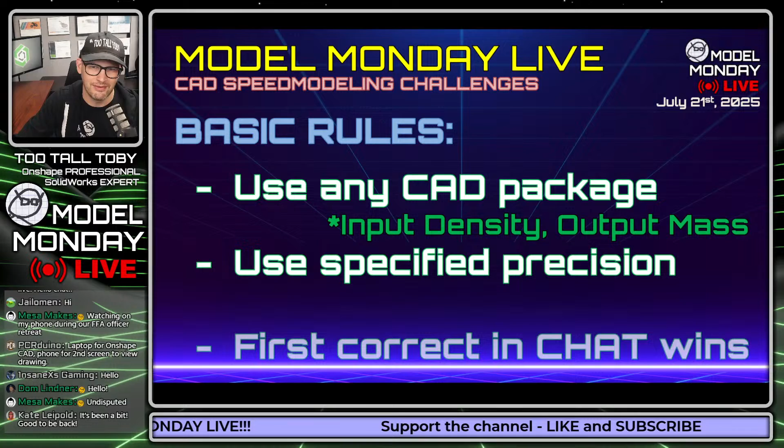The first person to answer correctly in the chat will win, and you will win a point on our Model Monday Live leaderboard. Now, I mentioned a moment ago that the materials do need to be correct, so you may want to take a screen capture of what we're looking at here.

You know, you could use the print screen on your keyboard, or use Snagit or MW Snap, or whatever it is you want to use, Windows snipping tool. But maybe just take a moment and make sure you've got these materials and you've got the correct densities.

Now, over on the TooTallToby Discord, there is a channel called Materials Tools, where we've got a lot of people contributing and explaining how to set up materials for different CAD systems, whether it's Onshape or Fusion or Inventor, or whether you're using FreeCAD or Libre or any of the different popular CAD systems.

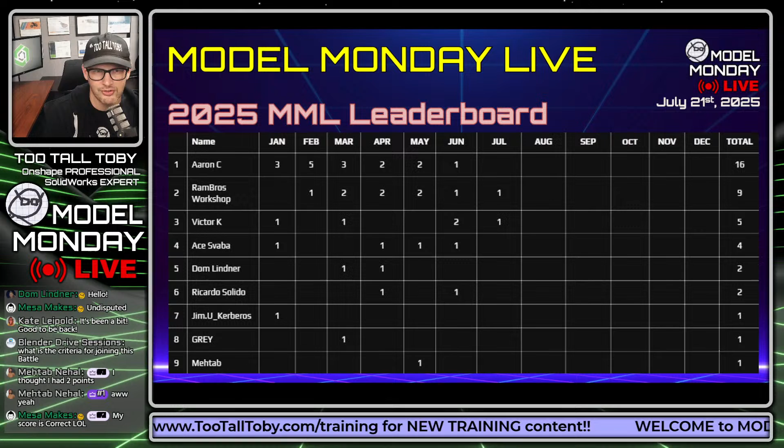All right guys, the advanced rules are this is meant to be fun and good-spirited. Occasionally I do make mistakes on the drawings, and when I do we just kind of correct it on the fly. And the Ivan exploit is permitted. If you're not familiar with the Ivan exploit, don't worry, we're going to be having a video possibly coming out sometime in the future.

All right guys, let's get into this very first challenge. This first challenge is going to be live as soon as I show this print full screen. You can start modeling, and as soon as you come up with the correct mass, just type it directly into the YouTube chat. This first Model Monday Live challenge begins in... wait a second, this looks like it's going to be a little off. Let's see if we can get this into a spot where we can see everything. We don't want to lose any data here. All right, let's see if that looks a little better. Begins in 3, 2, 1, go.

What is the mass of this part in x.xx pounds? Now, of course, this is an older part from one of our earlier tournaments, modified as always, we never give you the exact same models as we see in the tournaments. You can see here that this is a model created in inches, using IPS, inch-pound-second. So what is the mass in pounds? The material is plain carbon steel.

This is one that we are definitely going to add to the practice models library in the near future, because I think there are a lot of fun lessons to learn and cool things we can do to speed model this and create some tutorials for it. There's lots of cool, not really exploits, but time-saving shortcuts we can divulge by providing users with tutorials or demonstrations of how to model this part. So we're definitely going to see a live solve or a tutorial on this model, and also see it added to the practice models library proper in the next couple of weeks. Be on the lookout for that.

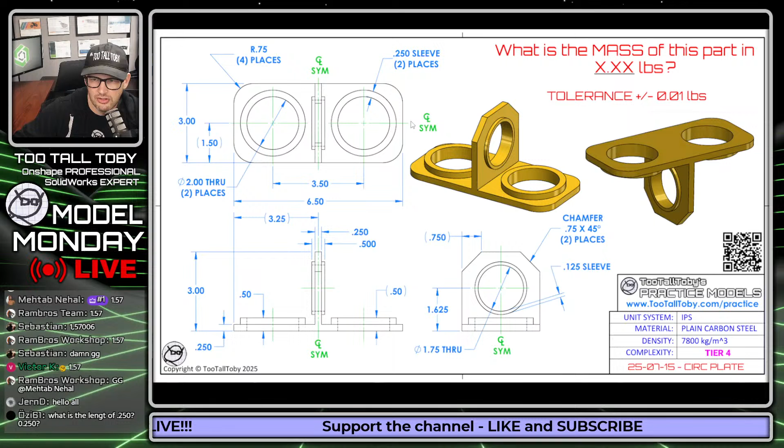What's up, Jern? How are you doing? What is the length of 0.250? It's in inches. It's in the unit system's IPS, and that means inch, pound, seconds.

All right, Spider Gaming revising his answer. You are allowed to revise your answer. That is allowed, and we just take whatever your final answer is as the answer.

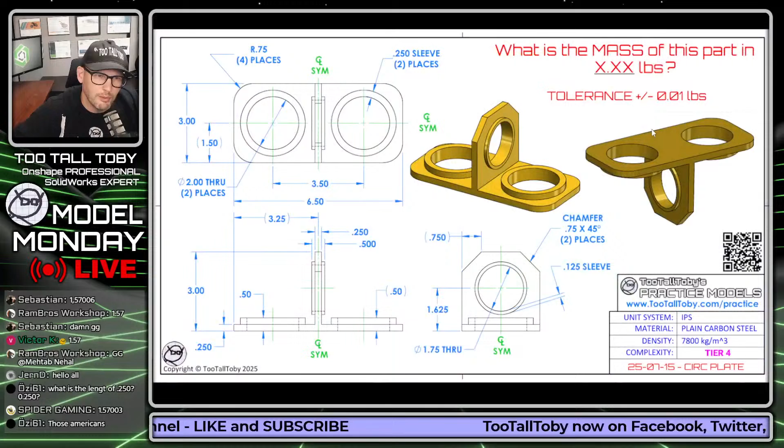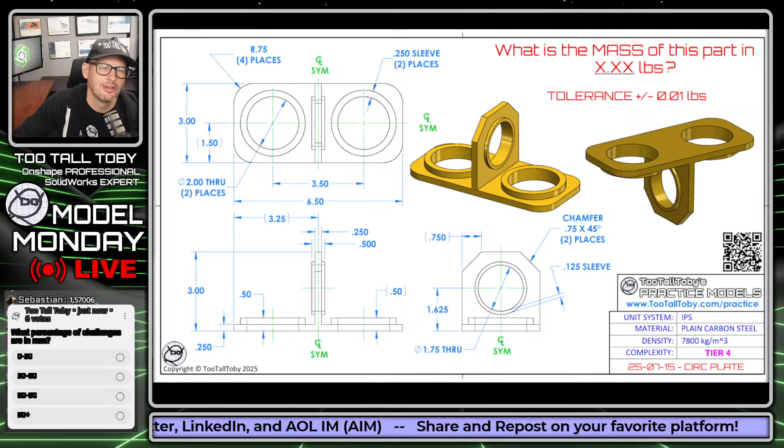I'm going to say, why don't you guys tell me in the chat what percentage of my challenges are in, let's just ask it here. I'm going to ask it with a poll. So here's the question: what percentage of challenges are in millimeters? We're going to say here 0 to 30, 30 to 60, 60 to 90, or 90 plus. So what do you guys think? What percentage of the TTT challenges are in millimeters?

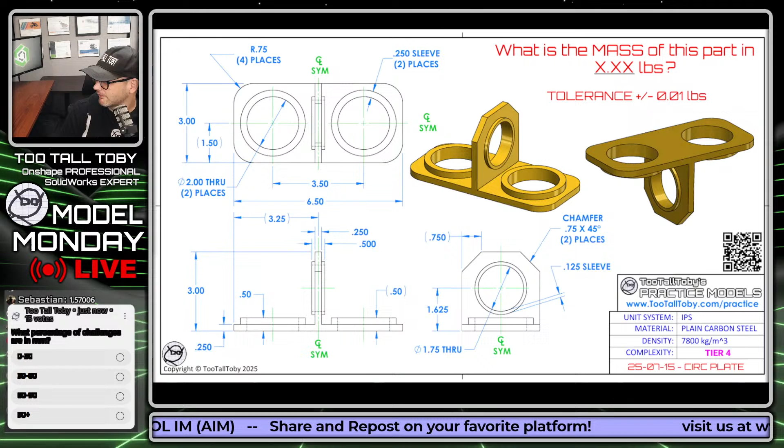Because I think it's pretty heavily balanced in millimeters, but you guys out there in the audience, let us know what you think. I probably didn't do very good ranges there. It's probably like 65%, something like that. The ranges probably aren't that good. So we're going to let you guys tell us what percentage of the challenges you think are in millimeters.

But we do try to create the challenges, some of them in millimeters and some in inches, because it's important for our users. A lot of our users are students, and it's important for them to know how to change their unit system. It's kind of like how we have different materials, it's important for users to know how to change materials and unit systems. It's just very important, because as they go through their career, there's going to come times where they need to change the unit. Now, maybe it's not from millimeters to inches.

Maybe it's from millimeters to meters or to centimeters or something like that. But regardless, the skill set is still an important one to learn.

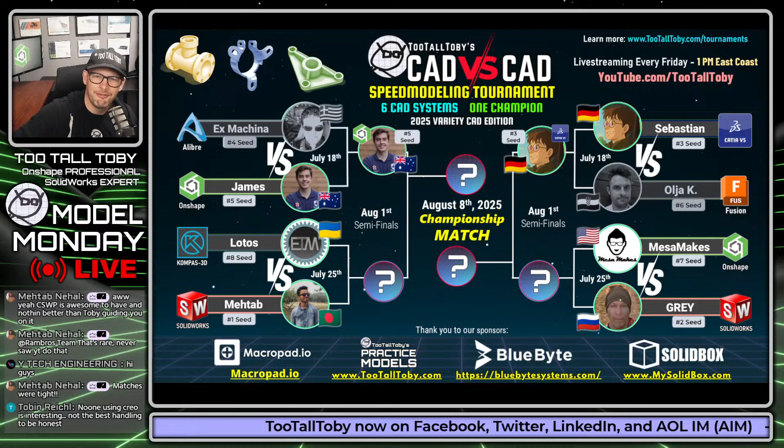But ultimately it was James using Onshape, our number 5 seed from Australia, who moved on, and it was Sebastian using CATIA, our number 3 seed from Germany, who moved on to the Final 4. So we are going to see them again on August 1st when we do our semifinals, and then whoever wins their match is going to go on to the August 8th championship match.

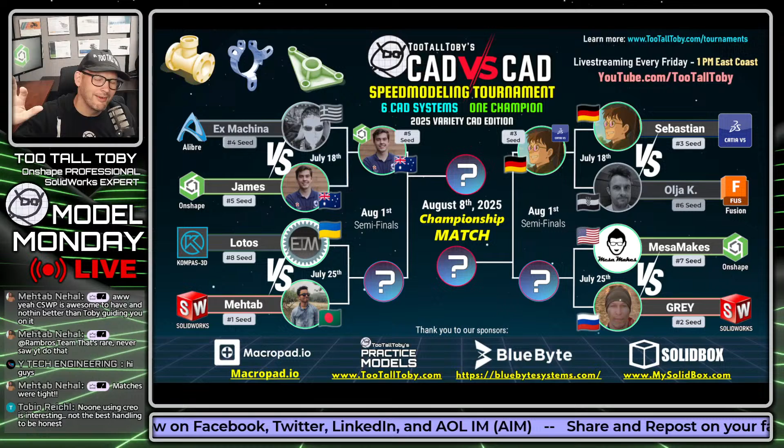Tobin in the chat says no one using Creo is interesting, not the best handling to be honest. Listen, any CAD system is welcome, and I do my best to get out there and advertise to all the different CAD systems. We haven't really seen much of a showing from NX, we haven't really seen much of a showing from Creo, but all CAD systems are welcome, and we definitely try to get out there and let people know.

And if you guys want to do the same, I know Kate is always out there letting people know in the Creo world about this contest and about these competitions. And we would love to get users in there.

Tinkercad, absolutely. Some of these CAD systems don't have the built-in functionality to assign material or assign density, but a lot of them have open source custom API capabilities or custom programming capabilities. So you could always create a custom script or macro that would do density in a program like Tinkercad. We saw that a lot with the FreeCAD community - they've gone through and created custom tools to calculate the mass based on density. So this is totally open to any 3D CAD system as long as you can create accurate measurements and create an accurate 3D model. As long as you can use that to calculate mass, all CAD are welcome.

If I can export an STL, it can technically compete in the TTT competition. Yeah, exactly. All right.

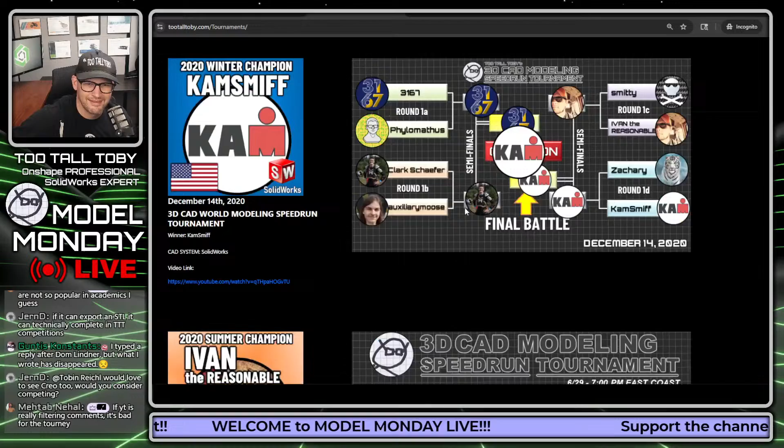Guys, the tournaments are underway. Check us out, TooTallToby.com slash tournaments. One of the things I like about that page is that it functions as the wall of fame. You can scroll down and see all of our past champions. I just think it looks really cool, being able to see all the different CAD systems that have won this tournament in the past. So congratulations to all of our past champions using all these different vibrant CAD systems. Very excited to see who wins this next one. It's definitely going to be exciting.

The other thing you'll see on the tournaments page is that you can click here for calendar reminders, and that takes you to a copy of my Google Calendar where each of the upcoming tournaments, along with their live stream info, is included. You can easily just say copy to my calendar. So if you're logged in and also logged into your Google account, that'll make it really easy to copy and paste this, and you'll have a link right to the live stream. So be on the lookout for that - it's just another one of the many services we offer here at TooTallToby.com.

All right, a little discussion there in the chat. I'm watching the discussion about the comments getting filtered. Yeah, it's not going to be good if they're getting filtered, and that filtering is not going to be good for the tournament. We actually almost saw something like that from Sebastian during the tournament, so we're definitely on the lookout for it.

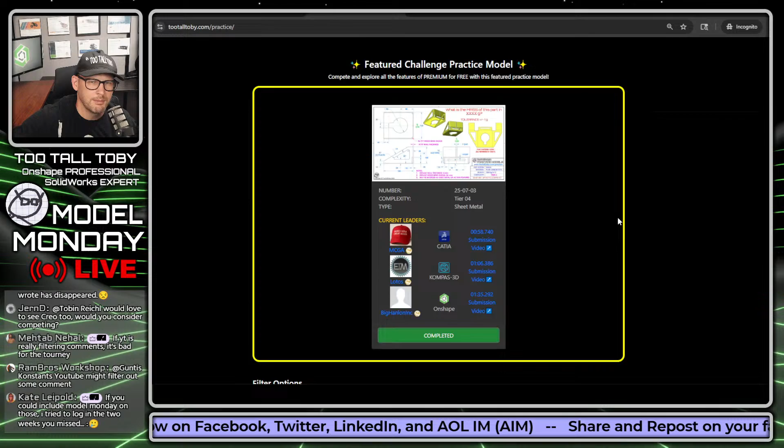So here inside the Practice Models app, we've got the section called the First 42, and that shows us the first answer submissions based on when the model is released.

In just a few moments, I'm going to release a new model here on the website. It's going to show up right here at the top, Featured Challenge Practice Models. It's available for all users. If you've got a free account or a premium account, you're going to be able to compete here today. We're going to see a second challenge show up here in just a couple of minutes, and then we're going to use the website to figure out who got the answer correct first.

So we'll be doing that in just a few minutes. But what are some other things going on with the Practice Models app? Well, first of all, we're adding 10 or more challenges every month, and the challenges have quite a bit of diversity. A lot of times when people ask me what's the deal with the Practice Models app, I like to say it's kind of like a gym for 3D CAD users.

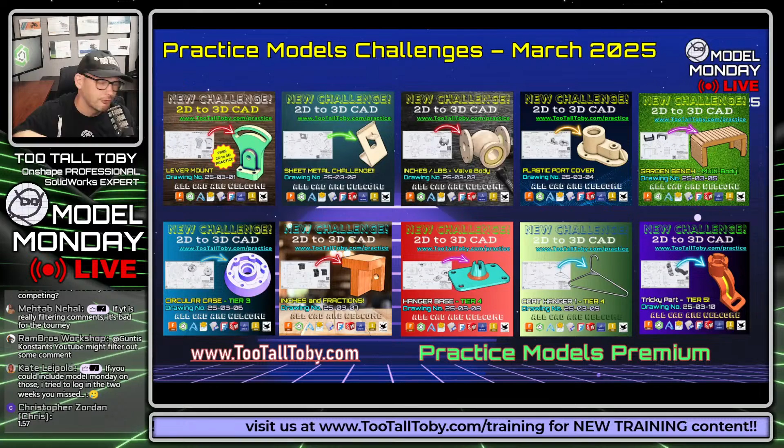Because a lot of times if you're using 3D CAD, you're only really exercising one muscle. You're doing the same kind of sheet metal bracket all day, and you never do molded parts, or 3D printed parts, or weldments. You just do sheet metal all day. Well, the nice thing about the Practice Models app is that those types of users get access to quite the variety of 3D CAD challenges, and in doing so, they might unlock some functionality in their CAD system that they didn't know they had access to, and that might make their sheet metal jobs a little bit easier, a little bit more efficient. So if you're in the world of 3D CAD and you know anybody who's a 3D CAD user, let them know about the Practice Models app.

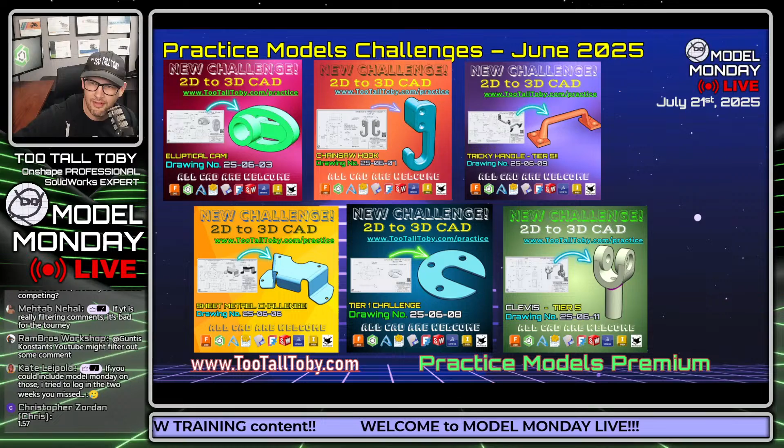And beyond that, we've got some really great capabilities in the Practice Models app itself. There's over 190 models. There's a scoreboard. There's now filters. You can access community tutorials. You can access speed modeling videos. So there's lots of good stuff in here.

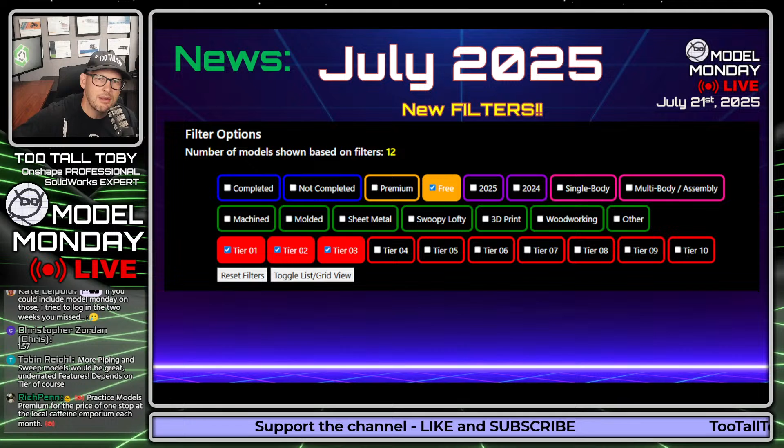And we continue to listen to our users to help understand what we should be adding next. We added the new Featured Challenge Practice Models section, where we can highlight some of the users from the community that are submitting speed modeling runs. We added the new First 42 section that we talked about just a moment ago. We added the speed modeling top 3 videos and the ability to submit a speed modeling video. And then more recently, we added some new functionality with the filters. And even more recently, we added some new sorting capabilities, and we added the new reset timer functionality.

So again, listening to the community here, what is the community telling us? Well, one of the things they're telling us is that it'd be nice if these filters were a little bit quicker. You click on free and then it takes forever for the page to reload. Well, guess what? Not anymore. Look how quick that happened.

199 models. I click on free and boom, we're down to 21. I only want to see the free models that are tier 1. Boom, we're down to these 3 models here. So this way, a brand new user could get logged in and could do some free modeling just to see if they like what's going on with the app.

But as you get more and more advanced, maybe you want to look at some of the premium functionality, and you want to look at some of the ones that are 3D printable. You can see we've got 31 models here that are 3D printable. And we're going down through here, but you know what? I've already done the ones that were first released a long time ago.

Well, check this out. Just recently released this new sort by first or sort by last. So now I can flip that, and now I can see the most recently released models first here up at the top of the list.

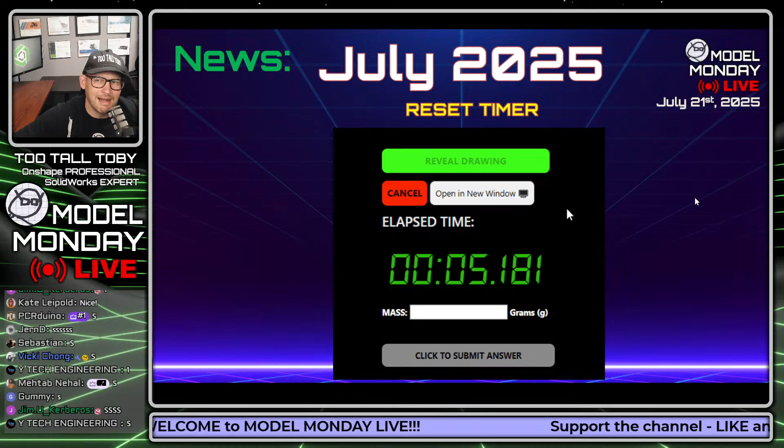So all this great new functionality is constantly being added. We're always trying to improve this so that we can give you the most for your money.

And let's take a look at this first challenge. The answer to this first challenge will be revealed here in just a moment, but let's take a look through the chat and see who answered first. I believe the first answer came in pretty quick after we showed the drawing.

Spider Gaming 2.35, Mehtab 1.57, Rambros Workshop 1.57, Sebastian 1.57, Rambros again 1.57, spamming it in there in case it's getting blocked.

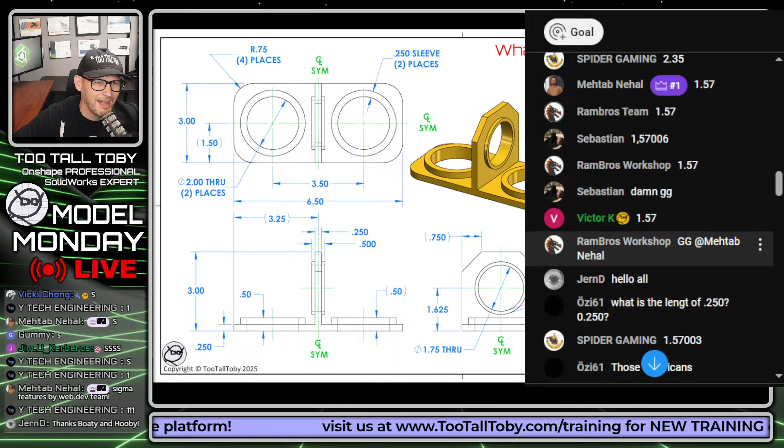Victor K 1.57, Spider Gaming 1.57, Gummy 1.57, Kate coming in with the answer 1.57, Mesa Makes 1.57, Paragene 1.57, Tobin 1.57. I love seeing this convergence of answers. Dom Linder coming in 1.57, Jim U 1.57, Jailomen coming in 1.57, PCRduino 1.57.

Very nice, very nice. I know somebody said that they answered and it came in the wrong order. I remember they said it came in right near Dom. Christopher coming in here 1.57. Very nice, well done everybody.

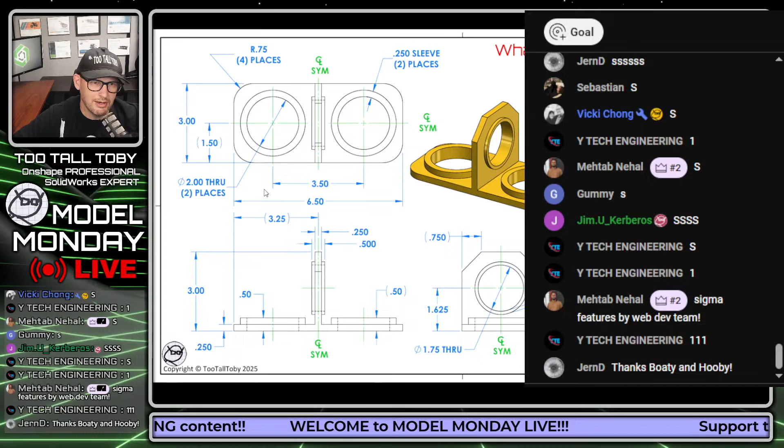Very nicely done. If you were able to answer that and answer it that quickly, that is awesome, you did an awesome job. But there can only be one winner, and that winner is Mehtab. 1.57 is correct. Mehtab was the first one to answer that correctly. We saw Spider Gaming came in first, but Mehtab was the first one to come in with the correct answer.

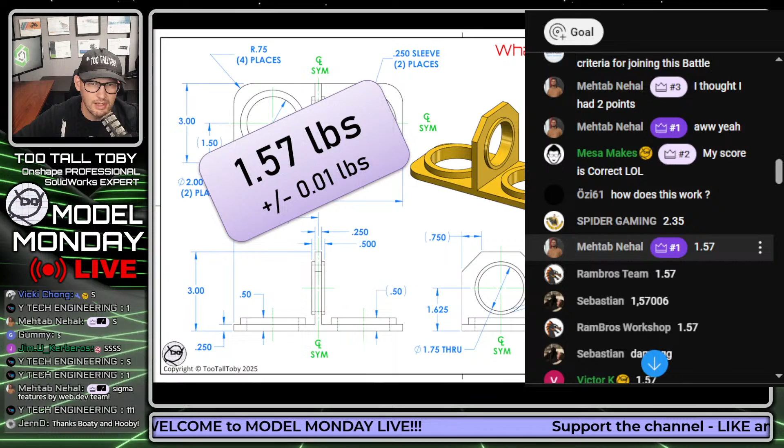1.57 pounds is correct. So guys, put a GG in the chat for Mehtab. GG, Mehtab, well done, well done my friend. That is awesome, and congratulations. Oops, at Mesa Makes, no, at Mehtab.

Congratulations my friend, well done, well done. Nice job, Mehtab earns a point here. That will be his, I guess, his third point, right? It'll be his third point because there's a little typo on the leaderboard. Well done, all right guys.

Well, that brings us to the second half of the show. Congratulations to everybody who got that. That was not necessarily that difficult of a model, but a pretty cool model. And it's not easy to model it up that fast, but I'm very excited to see what types of things people come up with. I was having a lot of fun in Onshape doing things like extruding this first.

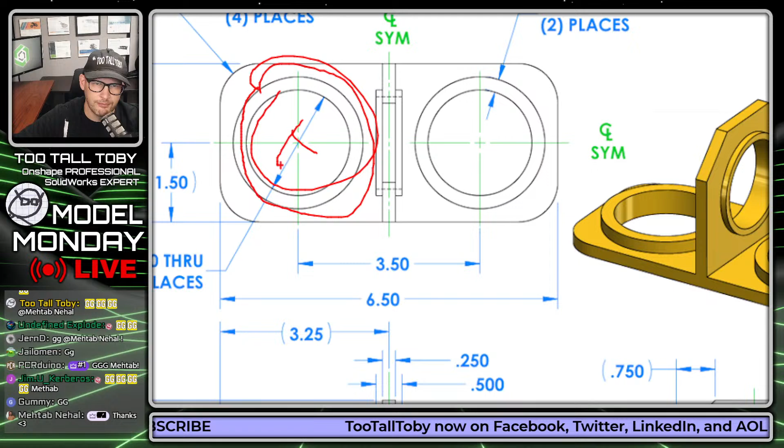And then taking this surface and extruding it, deciding whether or not to extrude both of them together or to mirror them. I think this might be a case where it's actually better to just draw both halves and extrude both halves together rather than mirroring. But I'd be really interested to see what people come up with. Normally a model like this you would mirror, but this might be that kind of rare case where it might actually be better to just do the mirroring at the sketch level and then extrude that whole thing as solid instead of mirroring at the feature level.

But that's where I think we're gonna have a lot of fun when we add this one to the Practice Models app and we can see how people do tutorials and speed runs for this challenge.

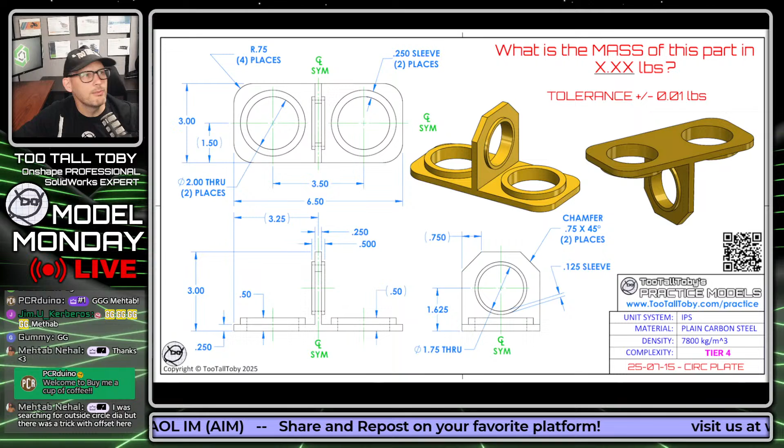All right guys, for this second half of the show, for challenge number 2, we're going to do things a little bit differently. We're going to visit TooTallToby.com, and we are going to make sure that we are all signed up for an account, because in just a moment a new practice model is going to be released. You're going to go to TooTallToby.com, go to the practice models page, and start refreshing on the practice models page.

So when we go in here and say access full library, what we're going to see is that in just a moment, a new challenge is going to show up at the top in the featured models. And when we see that new challenge in the featured models, boom, this challenge is live. It's going to be in the next 10 seconds. So get over to TooTallToby.com, get logged in.

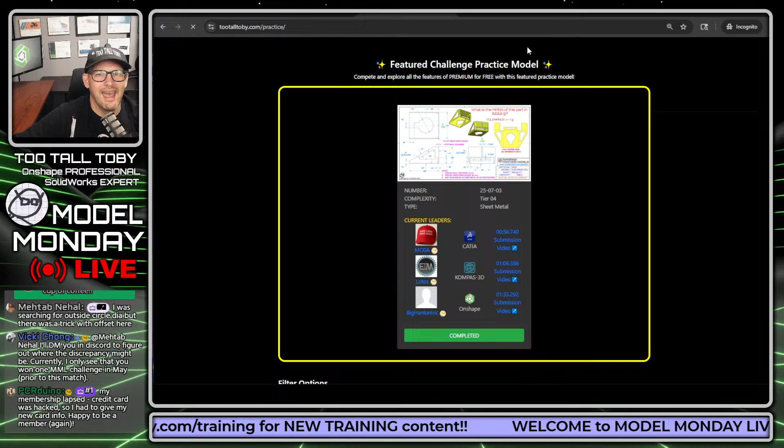See, it's not here yet. It's not here yet. We're going to hit refresh and it's going to be there. We're going to hit refresh, and it's going to be there. And so what you're going to see is that there's going to be a brand new featured model here. There it is, 250706, and boom, this challenge is live.

So good luck. This one is a mold/drafted part challenge, and this is one that I'm very excited to solve here live for all of you using Onshape, and we will get into that in just a moment. So go ahead, jump into it, it says click here to practice, jump into it, and all of you can attempt to model this.

And now we are going to attempt to model this together using Onshape. So right now we're watching this episode of Model Monday Live. It's July 21st, and all the people over in the chat are attempting to create this 3D CAD model, and now we are going to try to create it as well. Maybe we can beat some of these speedsters in the chat.

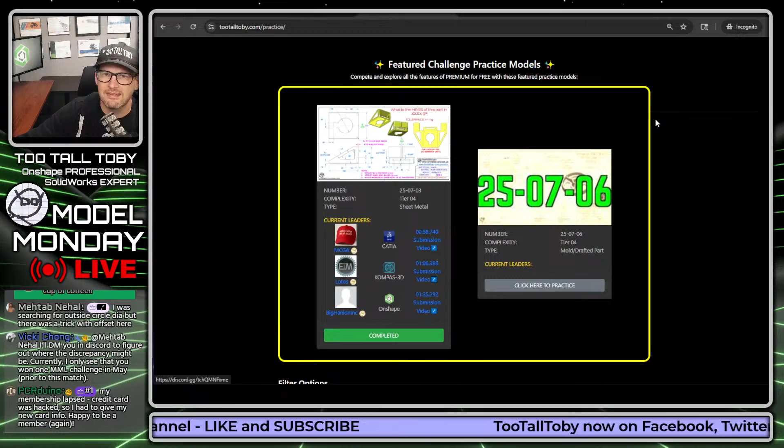So we're going to head on over to TooTallToby.com. We're going to sign up for a free account. We're going to click Access Full Library. And we're going to see here that up at the top of the library, this is a library of over 190 challenges. They can be sorted by the type of challenge that you're trying to do, whether you're trying to do a 3D printed part, a woodworking part, or a sheet metal part. They can be sorted by the level of complexity here, tier 1, tier 2, tier 3, tier 4, tier 5. Can do all this cool sorting here.

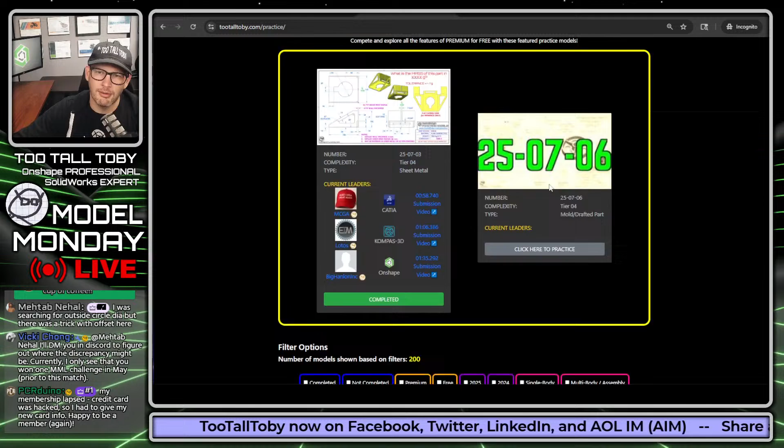But what we're also able to do is participate in these featured challenge practice models up at the top of the screen. And right now, all the people who are watching Model Monday Live are trying to complete this challenge here. So I'm going to click here to practice.

And we're going to see here that there's a lot of skills that are tested in this challenge. Draft, patterns, revolve, ribs, slot tools, symmetry, thin walls. I got a feeling this is a part that's going to be plastic injection molded just from that list of skills there. So let's see here. Nobody's done this yet, but we just released it about 30 seconds ago, so of course nobody's done it yet. I'm going to say click here to begin and go.

So the question here is, what is the mass of this part in grams? And we're going to try to calculate that mass, and then we're going to enter it down here. And if we enter it correctly, we're going to earn a point. If we enter it incorrectly, it's going to say, no, your answer is incorrect, you need to keep trying.

So we need to come up with the correct mass, and we need to come up with the correct material density. So we see down here in the title block that the material density is 1020 kilograms per cubic meter, and that is the material ABS, which I've already got in my Onshape custom library.

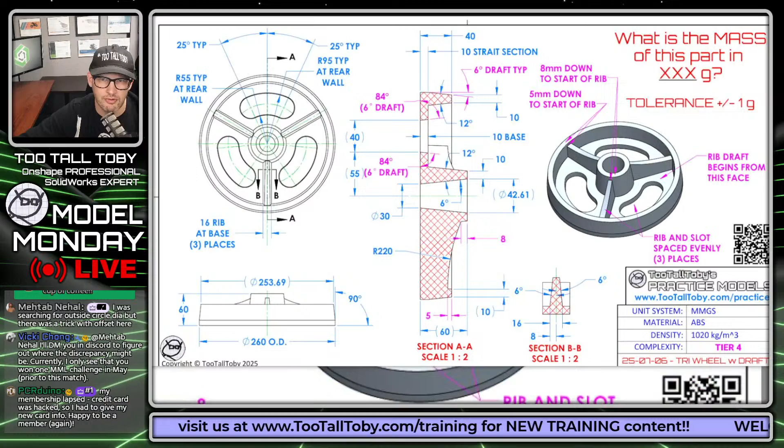So what I like to do is, even though the clock is running, before I get started, I like to come up with a game plan of how I'm going to model this thing up. So I'm looking at this thing, I'm seeing that there's a lot of draft on this part. We see that there's 6-degree draft typical. So we've got this draft here on this sidewall, some draft here as well, some draft here in this kind of center hub area, some draft all the way down to the bottom here.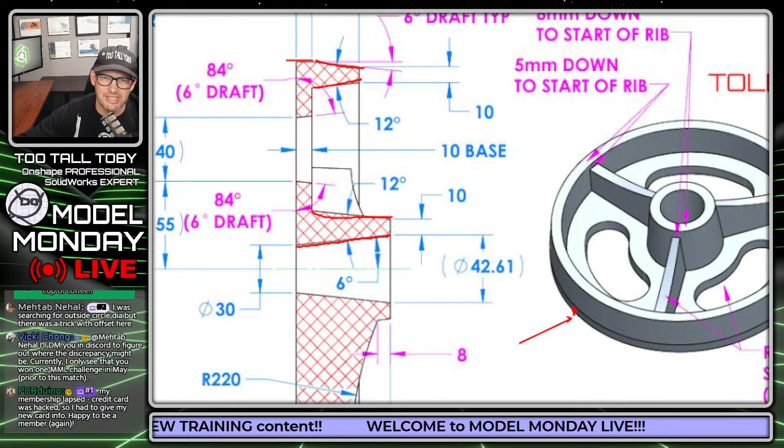It is kind of interesting. There's a section here that's got a note on it that says 10 millimeter straight section. So it's almost like the sidewall here, if we're looking at this thing in the isometric view, there's like a straight section there for some reason. Normally you wouldn't see that in injection molding, although depending on the geometry and depending on the material, sometimes you could get the ejector pins to push that part out even if it had a flat wall there. But you run the risk of that maybe getting stuck in the mold. So normally you wouldn't have that. But in the case of this model, we can see that we do have a little section on the model that is truly vertical. It's kind of interesting there.

All right, so now let's talk about the game plan. I think in a model like this, what I'm going to do is start out with a revolved shape. With a revolve, what you would do is start out with maybe a construction line coming up through the middle, and then create the geometry that you're going to be revolving about that construction line. So I think what I'll probably do is draw a shape that looks something like this.

If we were imagining this as a section view, I'll create a shape that looks something like this, and I'll leave that gap there for the center bore, and then I will revolve that about a center line, and that's going to give me kind of the main wheel shape.

So if we're looking at this over here in the section view, that shape I just drew is going to look something like this. It's going to come up here, over, down at the angle. I'm going to include the draft angle there, over, up at a draft angle, down here. Then we'll have this little straight section, and then we'll close that off.

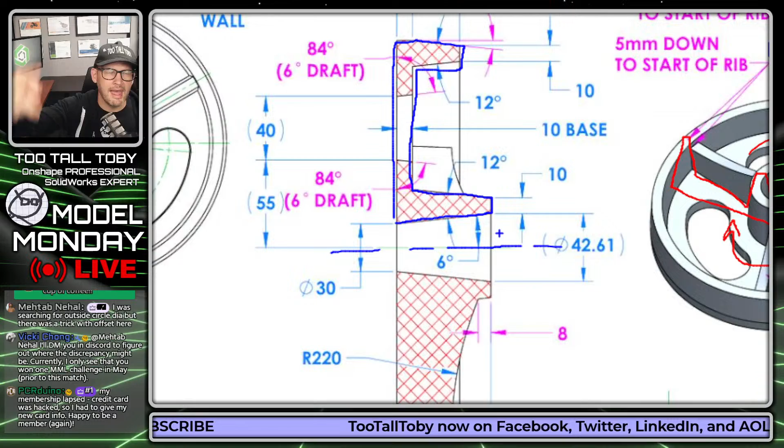That's going to be my first sketch, along with a little construction line here, so I can revolve that first sketch. I think the next feature I'm going to tackle is this rib shape. We notice with these notes on the rib shape, we're starting out 8 millimeters down from the middle of the part, 5 millimeters down from the outside of the part. And it looks like that rib has some curvature to it, a radius here of 220 millimeters. So it's kind of an interesting, curved rib shape.

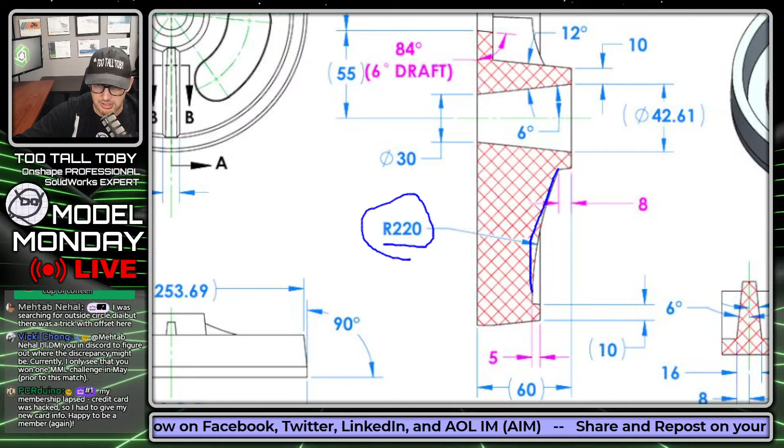I think what I'll do is create that right on the right plane, create that rib, and then bring it down with some straight geometry, straight down into the model. Then I'll go back in afterwards and add some draft, because you can see the rib draft begins from this face down here. Another little Toby note there - you wouldn't normally see that in an engineering drawing, but we're doing kind of education here.

But instead what you'd typically see is this section view BB, where we're clearly seeing this is 16 millimeters at the bottom, and it's got 6 degrees per side of draft going up to the top. There's also a note looking down on this from the top view - these ribs are 16 millimeters at the base. So a little bit tricky here, if you've never done any injection mold design, this might be new to you.

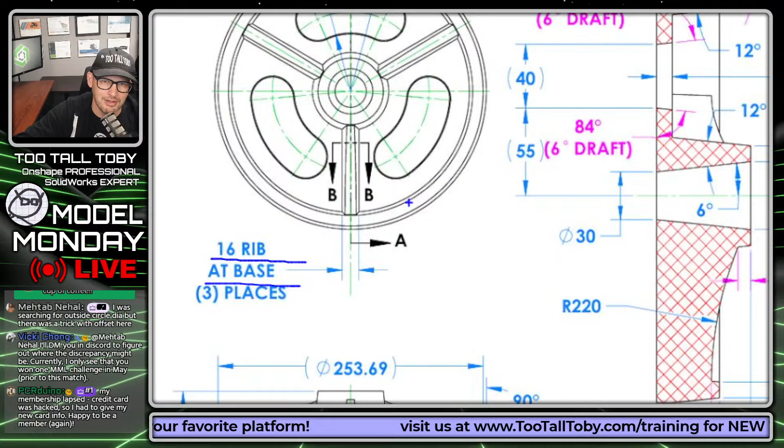But basically, we'll add some draft here using what's called a neutral plane, and then we'll bring that up. This is kind of a cool feature because we're also going to use what's called intersection curve, which is kind of a cool thing you can do when working in 3D CAD.

All right, so that takes care of those features, and then I think the final feature we need to create is this slot shape. Once again, we have some draft here on this slot shape. We can see we've got this dimension 40 at the bottom, 40 at the bottom here, and then we've got 6 degrees of draft on that slot shape.

And then if we come over here, we see this note says radius 55, so this radius 55 here at the rear wall, radius 95 at the rear wall. And so that 55 and that 95 makes that 40 that we saw in that side view.

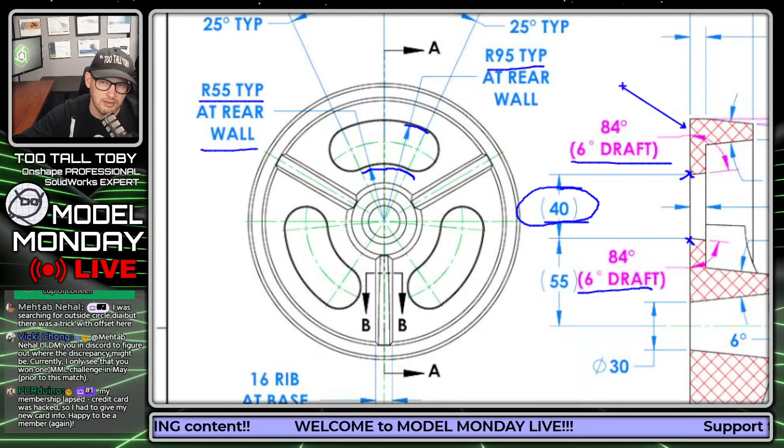So I think what I'll do is create that sketch on this back face, and then I'll probably just cut extrude it with draft - may as well just include the draft in that cut extrude. So a few different ways we're going to be creating draft here: draft during the revolve, draft in the rib with the neutral plane, draft as its own feature, and then draft as part of the cut extrude.

And then once we're done, we can just pattern that around 3 times, and we should be good to come up with the answer. So let's see if that comes in correct, and let's see if any of our speed demons in the chat are able to beat me.

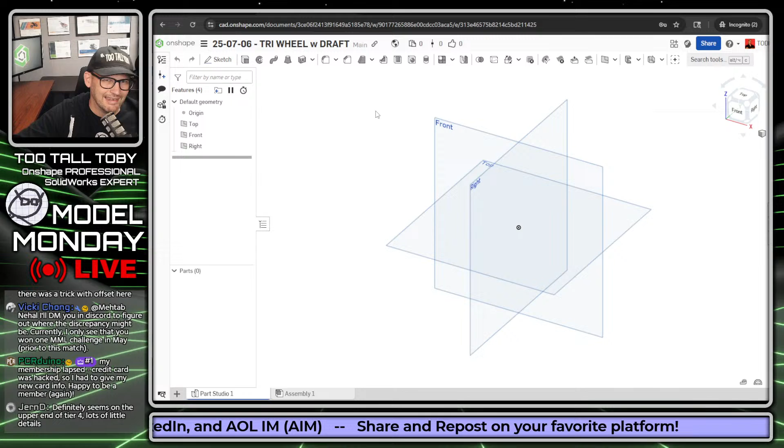Jern in the chat says, definitely seems on upper end of tier 4, lots of little details. Yeah, it was surprising to me how few features ended up in the tree. The tier 4 is really the complexity more so than the difficulty, and the complexity is just based on the number of features. Difficulty is a little bit more subjective, based on your experience. If you do injection mold all day, every day, this probably won't be that difficult. But if this is your first time working with an injection molded part, you might get a little bit lost in the details for sure.

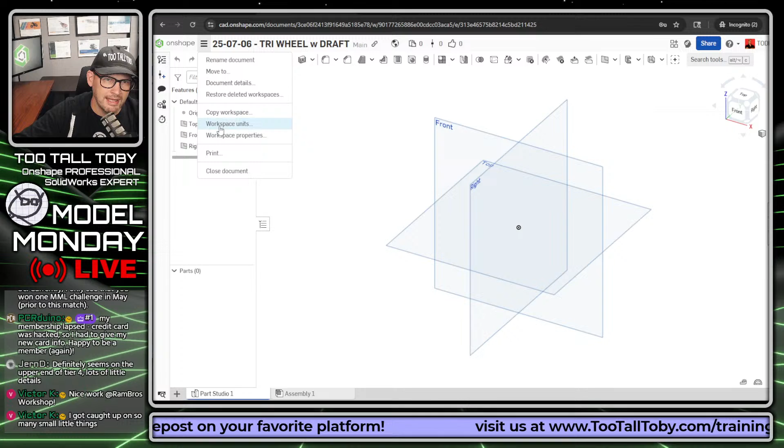All right, now that we're in this model here in Onshape, I'm going to start by clicking on this icon up here. That icon is going to give me access to a menu, called a hamburger menu, and from the hamburger menu I can choose my workspace units. I always like to do this, look at the drawing, look at the title block. It says it's in MMGS, so I always like to make sure my unit for length is in millimeters and my unit for mass is in grams. Those two both look correct.

Now let's get into our game plan here and start with our first sketch. I think I'll go to the right plane to create this sketch. I'm not really sure which plane I want this to be on. This is kind of like the front view, right? Should I sketch it on its side? This is always a question that's sometimes easier to answer when you know how the model is used. But I think what I'm going to do is just make this my right plane, and sketch the whole thing on the right plane in kind of an upright position. I don't know if that's good or not, it depends on how this model's used in an assembly, but it should work fine.

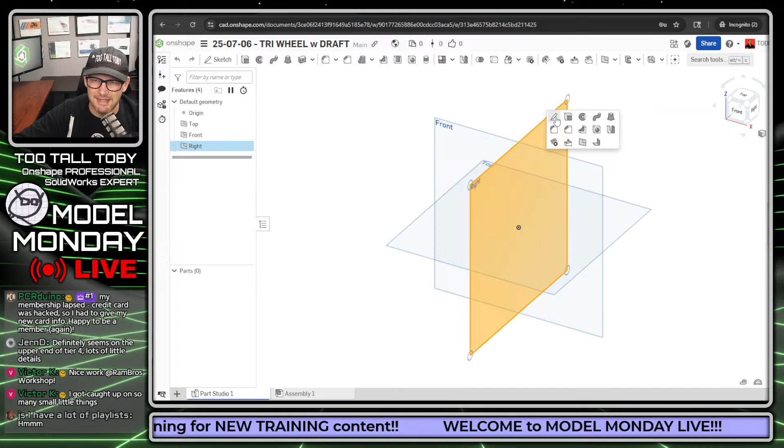So right plane, I'm going to press the S key, begin a sketch, press the N key. Actually, before I get started here, let's bring up our keyboard cam, that way you guys can see all the keyboard shortcuts I'm using. So I click on the right plane, press the letter S, choose the sketch command, press the letter N. Now I'm in a new sketch on the right plane, and what N does is it rotates the view normal, so it's a little easier to see. Now I'm going to press the S key again.

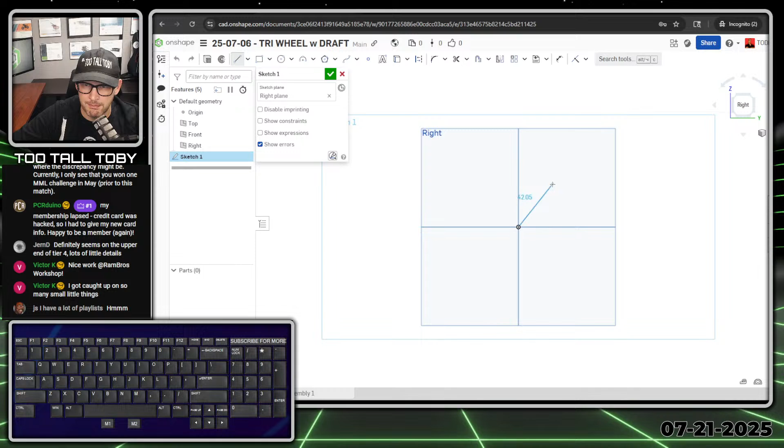I'm going to create a line here, single click the origin, move over, press Q - that makes that for construction, and I'm just going to drop a line out here. Maybe I'll make this close to the 60 millimeter max height, just to give me a little sense of proportion. Now I'm going to hit escape, and create some additional geometry using the line command. So single click the line command. I could click here on this point, move up, single click, let go of my mouse, and type 15 because that lower bore is 30 millimeters. Then I can come out this way the rest of the way. Again, I'm just trying to establish a sense of proportion so that I'm not too far off with my final results here.

So this one I'm going to come up at 10 millimeters, so I'll move over here, 10, single click, let go, 10, enter. Then I'm going to come up at an angle, move down this way, single click, let go of my mouse. I'll type in 10 because that upper ledge is 10 millimeters. Move back down here at an angle. Now the base is also 10 millimeters, so I could hold my mouse over this point and get a relationship there of vertical, and that way I don't have to add that extra dimension.

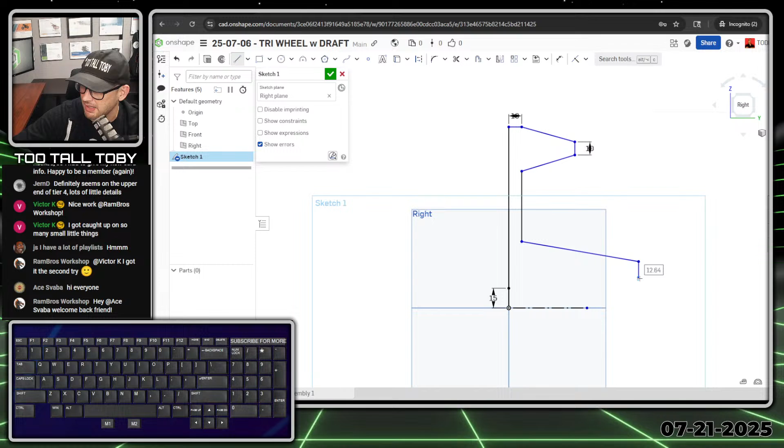Move my mouse down this way, move my mouse up like so, single click, move my mouse this way, single click, let go of my mouse. I can type in 10 again, enter, and then I can finish off by coming down here to that original point. Single click, and boom, done.

Now, personally, I think I would rather have a diameter here at the bottom, so I'm going to hit escape, single click, eliminate that dimension, maybe even eliminate that line. It's not really going to hurt me, but it's just kind of in the way. And then I could take this point and make them vertical, V. So that line there goes black. This line here, it's orange currently. You can see it's black, meaning it's fully constrained.

And now I can go D key dimension, and I can create a dimension from this point to this line and then move across that line. That lets us create what's called a doubled dimension in Onshape, very useful. So we're going to make that 30, enter.

We're going to create a dimension here from this point to that line. Again, cross over that line for that doubled dimension. That's going to be 260, enter. We could create a dimension that goes from this line to this line. That dimension is going to be at a height of, what is the height to that location? Let's see here, 40, enter.

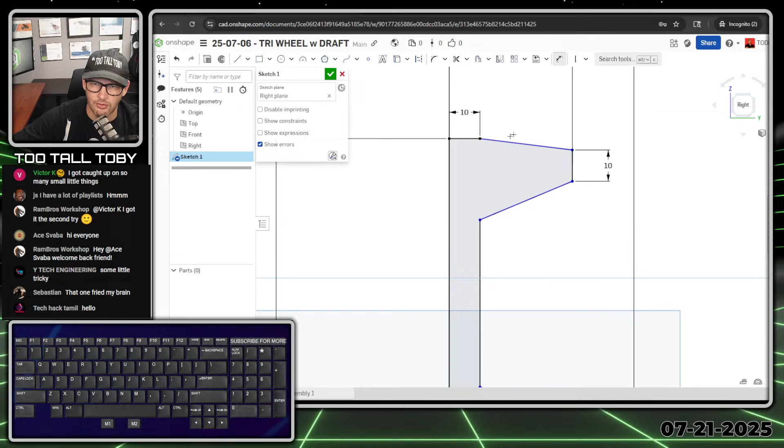And then a dimension from this line to this line. That's going to give us a height of 60, enter. And then the final dimensions we're going to put in here are going to be our draft angles. So from this line to this line here, that's going to be a draft angle of 6. From this line to this line here, that's going to be 6 plus 6, so that gives us 12. So draft in both directions. Dimension here from this line to this line here, that's going to be 6. And then a dimension here from this line to this line, that is going to be 12.

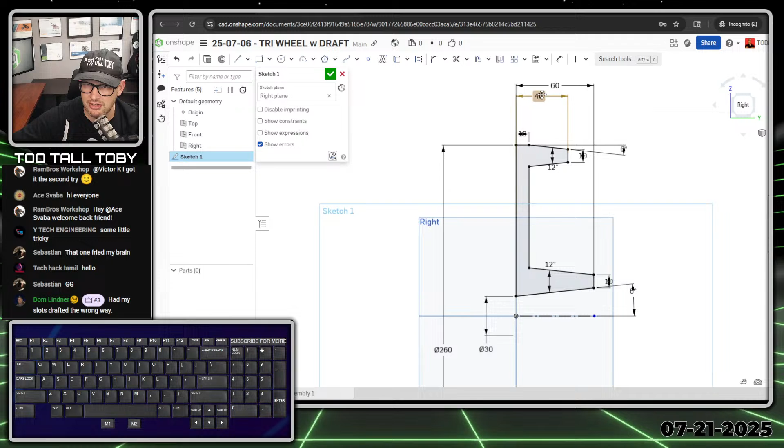And for me personally, I think this is a great place to stop with that first sketch. It gives us all the key dimensions for that revolve. The sketch is starting to get a little cumbersome, and I don't really like it when my sketches get too complicated. So if you're watching this as a tutorial, maybe take a moment, pause the video, and get your sketch to look like this, and then you'll be ready to move into the next step and turn this thing into a revolve.

So I think what I'm going to do next is choose to revolve this thing.

I see in the chat, Sebastian says that one fried my brain. Yeah, this is definitely one with a lot of cool little details, so I'm glad to hear that. I'm sorry to hear your brain got fried, but glad you like these kinds of challenges, because these are the fun ones. Remember, the website's supposed to be like a gym for your brain. TooTallToby.com, practice models, it should be like a gym for your brain. So if your brain feels fried this time and you go back and do it again, you're going to feel a lot stronger. And then when you run into something like this at the office, you're going to be ready to go, ready to handle it.

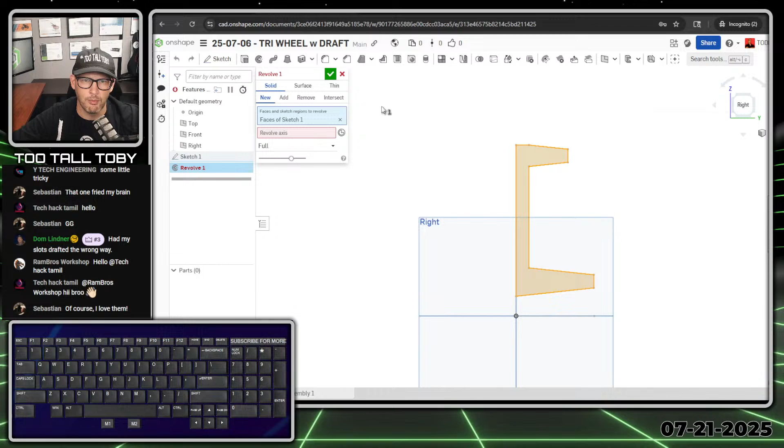So let's say this is our first sketch. We're going to go to revolve. In Onshape, I've got this whole sketch and this center line that I'm going to revolve about. So I just click revolve, and then press tab. Tab will advance me from this box down to this box, so I use the tab key as a shortcut there for that workflow. Now I'm in revolve axis. I can just click on this line down here, my center line, and then press enter. Boom, there's that revolved shape, and that's the main shape of the wheel.

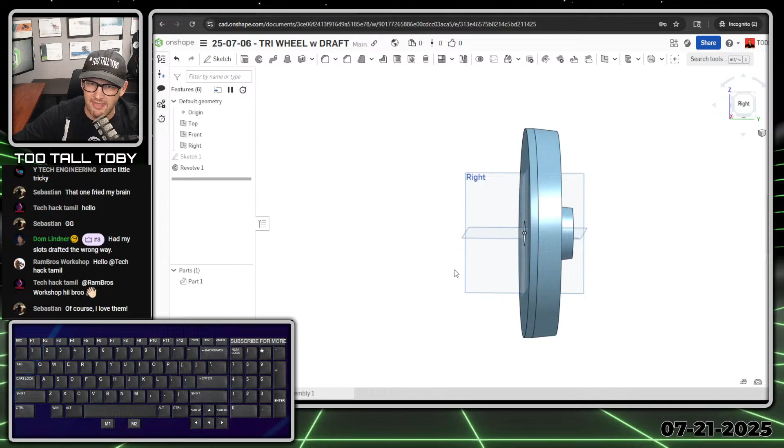And let's now move on. So I'm going to press Shift 7, which is my shortcut for isometric, and that way I can see which plane is cutting down through the middle here, and it looks to be my right plane. So I'm going to pick that right plane, S key, begin a sketch. And now I'm in sketch mode here on the right plane.

Now I'm going to use a really cool command in Onshape called intersection curve. What intersection does is let us grab the intersection of the right plane we're sketching on and this face here, which is a cone, and turn it into a line.

It's going to let us grab the intersection of the right plane and this face here, which is planar, so we'll have a line that comes across here. And the intersection of this cone face and the right plane creates a line here like so.

And I'm just going to grab a few other lines. The reason I'm doing this is because I think it really makes it easy to visualize what's going on through that section of the model.

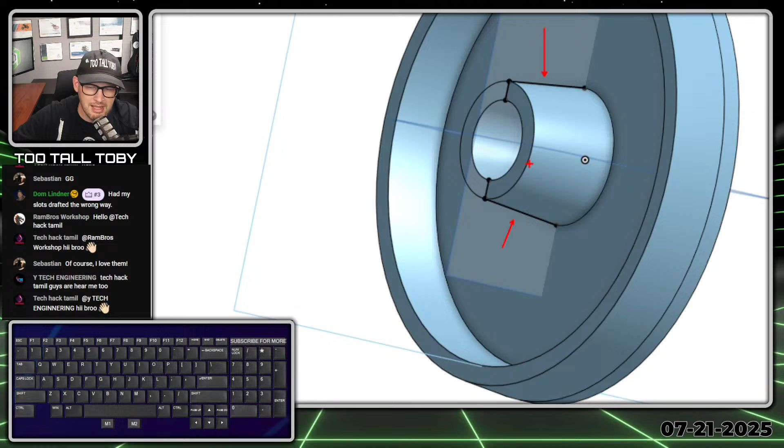So I'm sketching here on the right plane. I'm going to fly out this menu that says use, and choose intersection. Then I'm going to start picking faces. This face here, wherever it's intersecting the right plane, lines have been created in my sketch. This face here too, and this face here, and this face here, and maybe even this face here.

So that really makes it easy to quickly get almost reference geometry that you're going to need to create this rib shape, or that's going to help you create it. Because now, to create the rib, all we need to do is choose the 3-point arc command.

So I'm going to exit the intersection command and choose the 3-point arc command. I'm going to draw an arc that goes from here to here, a little arc between those two. Then I'm going to give that arc a radius of 220. 220, enter. Now what do I need to do?

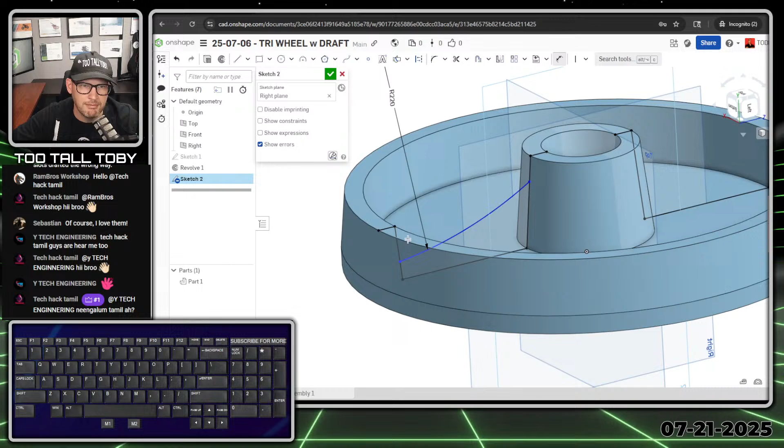All I need to do now is add in my dimensions. So I'm going to press the S key, go to dimension, and create a dimension that goes from this line to this point. That dimension is going to be 5, enter.

Let's hit escape and get this point down below here. S key, dimension from this line down to this point, and that's going to be a dimension of 8. And boom, we are done with that sketch.

That's the sketch for the rib. Now, I know that there's a lot of extra geometry here. Do we have to go through and delete that? No, not at all, not in Onshape. We can just exit the sketch and choose the rib command.

Here's the rib command in Onshape, rib up at the top there. Once we choose that rib command, we can choose our sketch profiles, which is just going to be this arc here. We can then choose this second box here. I noticed it really helps if you choose this second box, parts, and then just click this part.

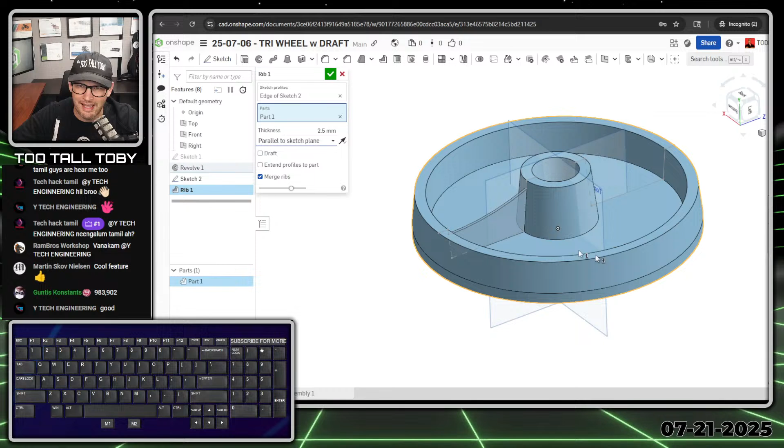So if you're not getting your rib preview, that may be the extra step you need. Just make sure you click in that second box and click this part. Then you've got the option here, parallel to sketch plane or normal to sketch plane. You see normal to sketch plane, it goes a little crazy, and parallel to sketch plane actually works this time. Basically that means that when we sketched on the right plane...

The right plane is running through the model like this, so the rib is also going to run through the model like this. It's just going to run parallel to the sketch plane as opposed to normal to the sketch plane, which would be 90 degrees from the sketch plane. Sometimes that's what we want, but not in this example.

So we're going to change that thickness to, let's see here, 16 millimeters, enter. And there we go, there is our rib. We're also going to use this option that says extend profiles to part. That will extend this little extra amount here, if that extra amount wasn't coming through. Then we can hit the green check mark, and that creates our rib at 16 millimeters.

Now, the one thing about this face here that really doesn't look that good is that we've got this face, and this face, and this face.

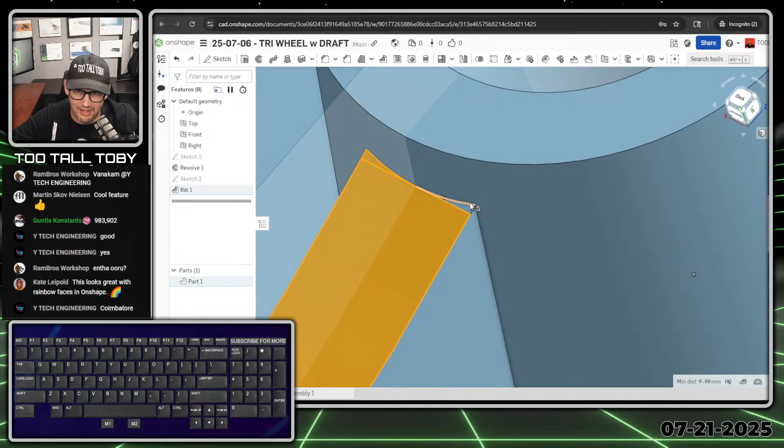We've got these extra faces here. So is that really going to make a big deal? It might not - it depends on if you're using finite element analysis, and it depends on if your machinists have a problem with having those extra faces. So if you do want to get rid of those faces, I think the best way to do that is to use delete face.

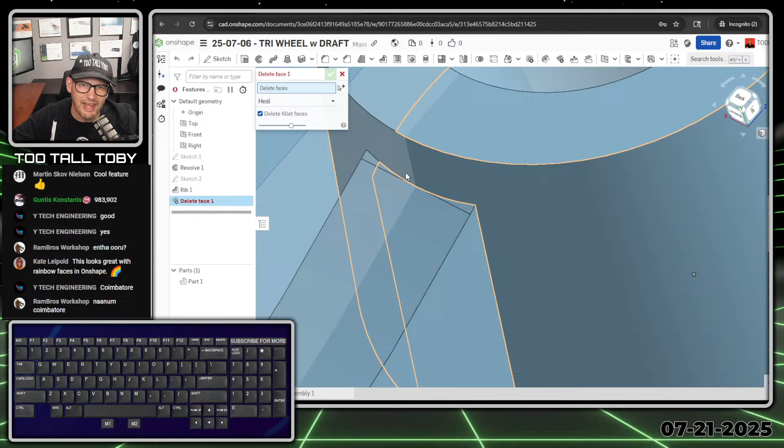So I'm going to choose delete face here. And when I choose delete face, I can choose this little dingus there, that extra geometry that I wasn't anticipating. So I'm going to delete those two little faces and say heal, and hit the green check mark, and oh yeah, that's what we wanted.

Thumbs up in the chat, thumbs up in the video if you enjoy that usage of delete face. We always see those questions - is there any way to get rid of these extra little faces? Well, a lot of times the way you get rid of them is with delete face. Yeah, delete face is absolutely epic.

So now we're going to add draft manually, or after the feature. We're going to do that by choosing this button right here, draft. So we choose draft, and then we say neutral plane. Now what neutral plane is, it's where the draft is originating from. And in the case of this rib, the draft is going to originate from that bottom face of the model.

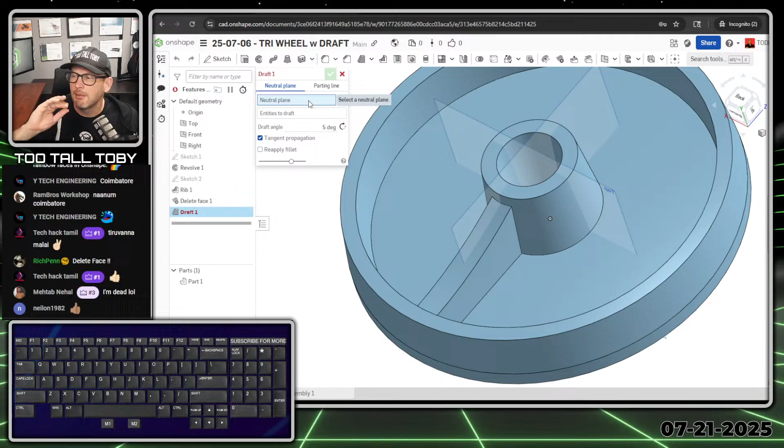We saw some notes on that, and we also see that in the section view BB. So the draft is going to originate from the bottom face of the model, or from this face here, the bottom of the pocket - so that is our neutral plane. And then for our entities to draft, we're going to choose this face and this face. And then finally, the draft angle is supposed to be 5 degrees per side, so you would just type in 5 here, enter, and enter.

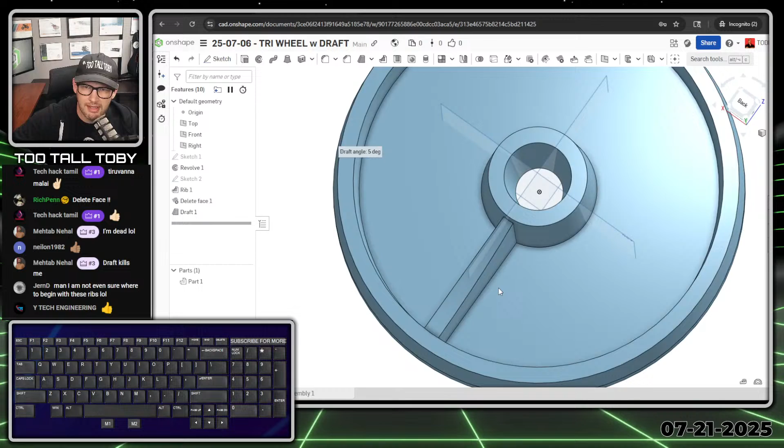And then we look at that rib, we look at the isometric view. Thumbs up, that looks pretty darn good. So that takes care of that feature. And now the final feature we need to create is the cut extrude on the back side of this, and then the pattern. So we're going to roll around here to the back side.

We're going to begin a sketch on this face here. S key, begin a sketch, N key to get normal to. And we are going to create a sketch of an arc here like so. And then we're going to hit escape. We will take this point of the arc and this point here at the origin and press I for coincidence.

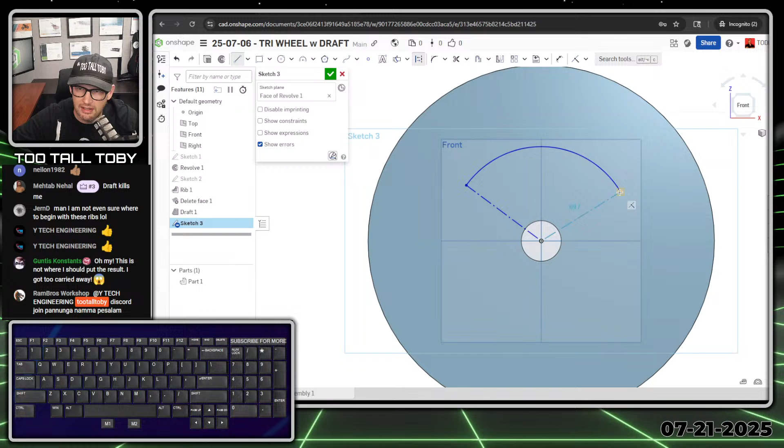And then we are going to create a dimension there. Actually, you know what, let's create some angle dimensions here instead. So we'll create a line here as well, and I'll use Q to make that a construction line. And I'll create a line here as well using Q to make that a construction line too.

So we'll create an angle dimension here at 25, and we'll create an angle dimension here at 25 as well. And then once we have those angle dimensions, let's just turn that arc into a slot. So we go up here to the offset command, and when you fly out the offset command in Onshape, you can choose slot. So I'm going to choose slot here, and then choose this arc, and that slot distance is going to be that 40 dimension.

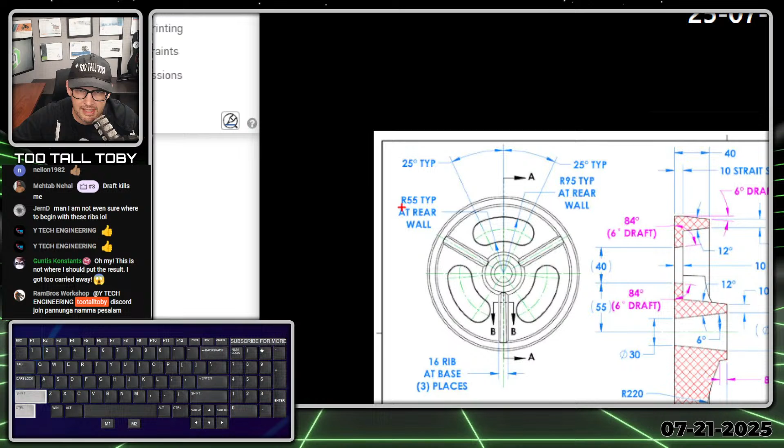It's going to be the difference between radius 55 and radius 95 - the difference between these two dimensions here, this radius 55 at the bottom and this radius 95 up here. So we're going to create that at 40, enter, enter. And then we can do a dimension for that lower arc, and that dimension is going to be 55. Once you have those dimensions in place, that sketch should be fully constrained or fully defined.

So again, if you want to pause the video, make sure that you've got that in the correct location if you're following along with the tutorial. And once we've got that, now we're ready to take this geometry and turn it into a cut extrude.

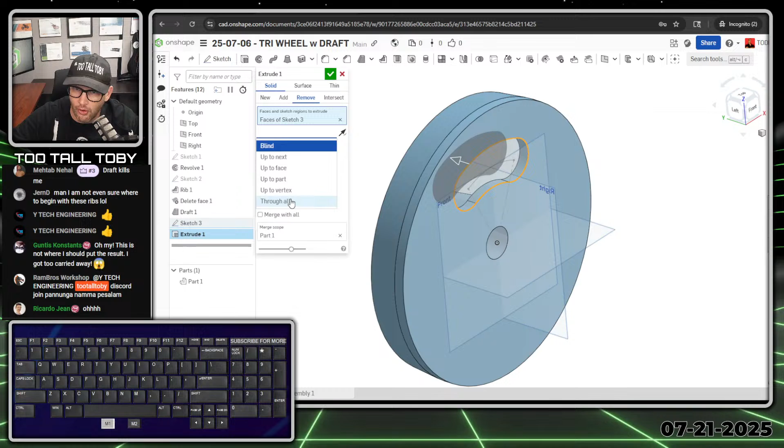So we once again choose extrude. This is going to be a remove, so we're going to be removing that. This could probably go through all. The only reason I'm saying probably is because sometimes when you have a draft, the draft can end up cutting into this wall.

So I'm going to say draft for this, and I want that draft to be, let's say we made it 20 degrees. Well, if that draft is at 20 degrees or more, maybe like 40 degrees, yeah, see here, it could end up cutting into this wall here. But I think with a very small draft, like 6 degrees, we're not going to have that problem. We got plenty of clearance there. So 6 degrees draft, that's going to give us 6 degrees per side, and we hit the green check mark.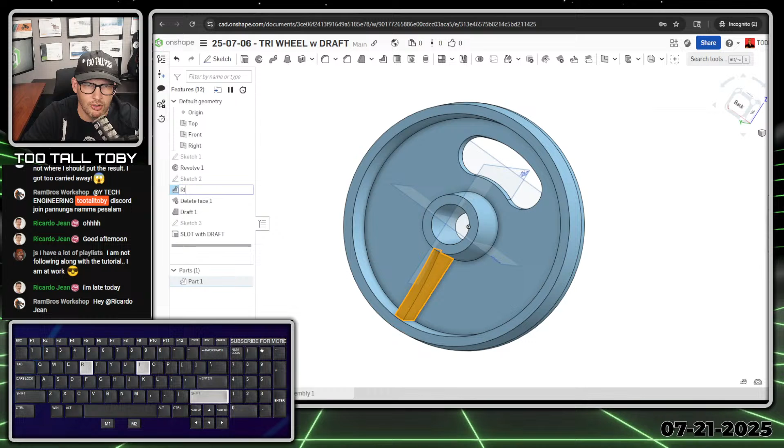And boom, there is our slot with draft. So pick on that feature in the tree, Shift N for rename, and you could call that something like slot with draft. And maybe this one up here that we did earlier, the rib, click on that rib, Shift N for rename. This could be called rib with no draft, so that I know some of the features have draft included in them, and some of them do not.

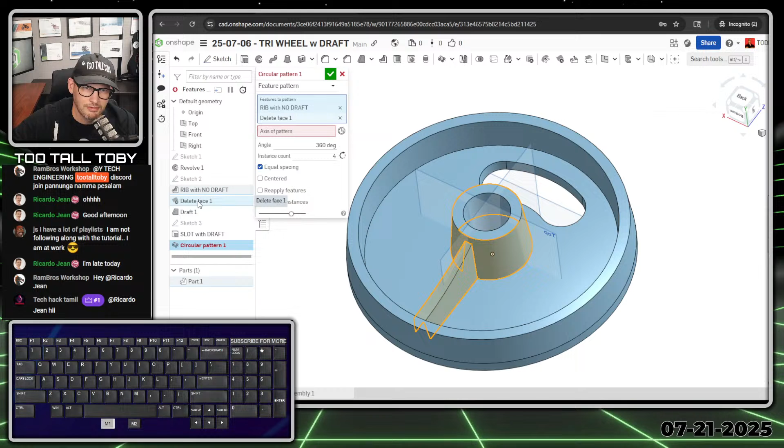So now in Onshape, we're going to finish this off by going into this flyout menu here. We're going to say circular pattern. And you want to remember in Onshape that you have to fly out this menu here and choose feature pattern. So circular pattern, feature pattern, and the features that I'm going to pattern, well, because I renamed them, it's pretty easy to find them here in the tree: rib with no draft, and then the next feature, delete face, draft, slot with draft.

And then the axis of the pattern, I'll just choose a circular edge, this one here at the OD. And then the number of instances here is going to be 3, enter. And look at that, that pattern's looking good in the preview. So I'm going to hit enter again or hit the green check mark. And there we go, there is the model.

We do what we call the final spin, kind of look at this thing all around, make sure it looks like the drawing. I think that looks pretty good.

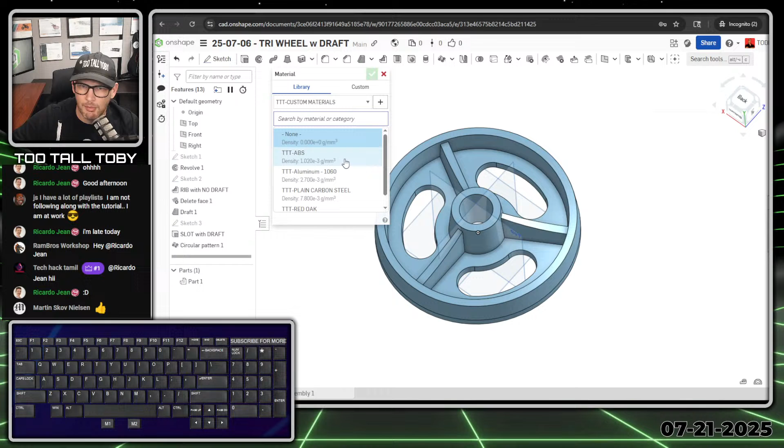And so now I'm going to go down here to the name of the part at the bottom. I'm going to right click and say assign material. And this material here is going to come from the TooTallToby library. I've got a video on this on how to set up the TooTallToby materials library, so I'll be sure to include a link to that video here in this tutorial. But we're going to say that material is going to be ABS and hit the green check mark.

And then I'm going to come down here to this corner and choose this little mass properties button, mass properties, and I'll click on this wheel anywhere on the wheel. And I'm coming up with a mass here of 943 grams.

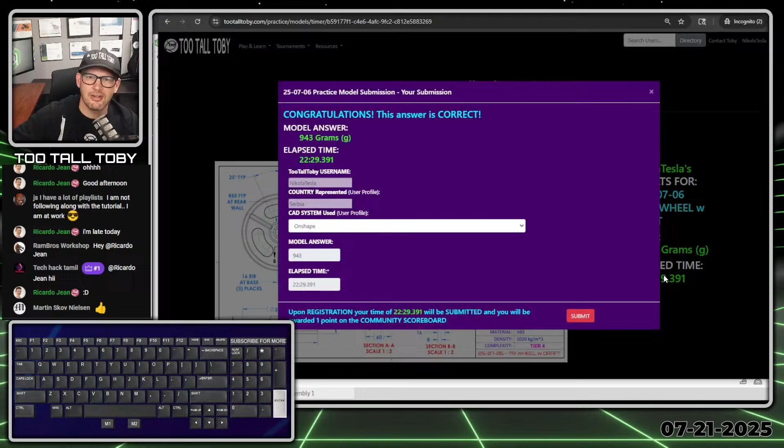So now I'm going to come back over here into the app and type in that answer, 943, enter. And oh yeah, we did it. Yes, we did it, we got it correct. Always feels good to get that purple box. And we see here that our time of 22:29 will be submitted and I'll be awarded 1 point on the community scoreboard. So I'm going to say submit, and yes, we did it, we got that answer correct.

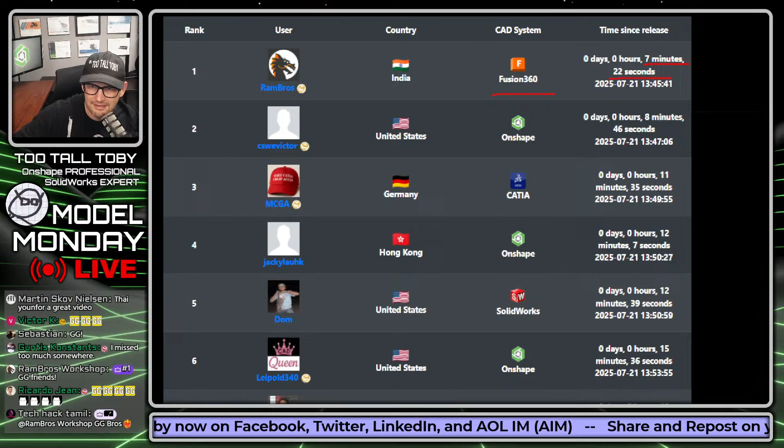Dom did it in 12 minutes, 39 seconds. Kate did it. Leipold340 did it in 15 minutes, 36 seconds. Mehtab did it using SolidWorks in 18 minutes. Jim U. Kerberos did it in FreeCAD in 25 minutes and 1 second. Nikola Tesla, that's my account, using Onshape, did it in 25 minutes, 18 seconds. And Perkins coming in on the bottom here from Ireland, 25 minutes and 19 seconds.

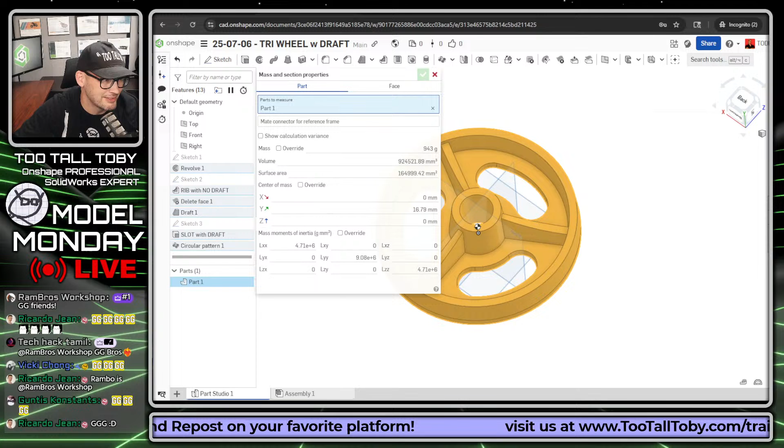Very nicely done to everyone. Definitely not an easy challenge, but a fun one for sure. So congratulations to RamBros Workshop.

You did it, you got it correct. You were the first person to get it correct, and you earned the point for this episode of Model Monday Live. Congratulations to Mehtab as well for earning that first point. And I hope you guys enjoyed that live solve. Lots of cool stuff in that model.

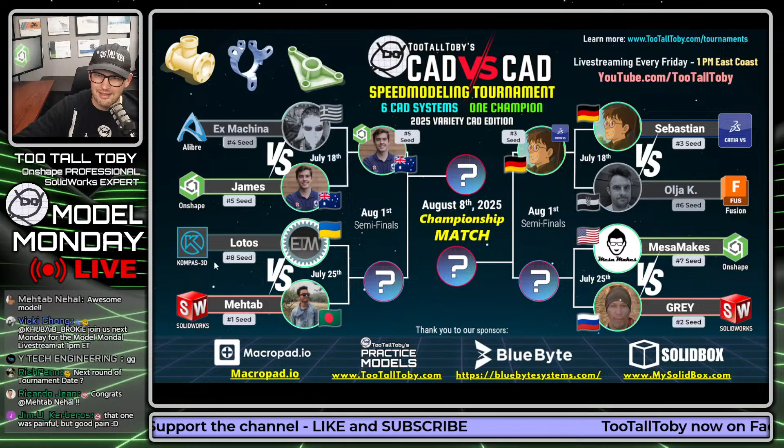We're going to see none other than Mehtab, our number 1 seed, going up against Lotos, our KOMPAS-3D user. And we're going to see GREY, our number 2 seed, going up against Mr. Corey Mesa, our resident Onshape wizard. These are going to be some really epic matches this week. I'm very excited to see how things turn out.